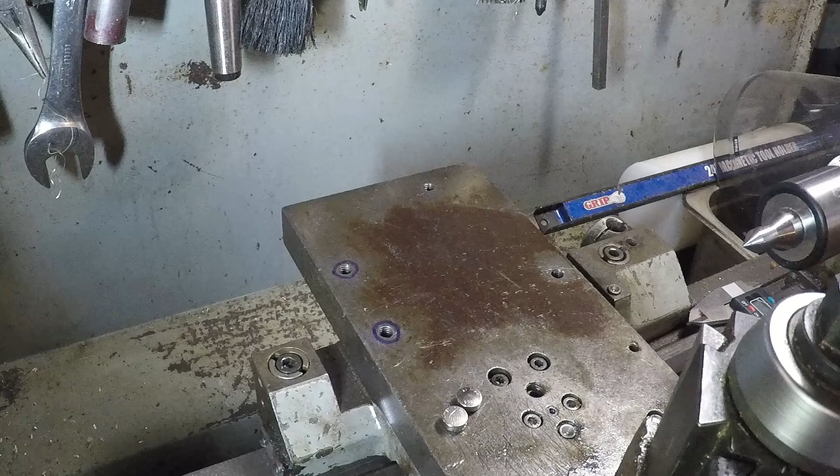So, shooting a video today, looking for some inspiration. Some guys have shown some stuff lately, specifically Max. I was running through one of your videos relative to your...

reverse position parting tool setup. That looks interesting to me because I absolutely despise parting off on this and pretty much any of my smaller lathes.

So I wind up with issues. I try all the dark magic, low speed, plenty of fluid, all these other things that should be working for me. It just doesn't seem to, because I think to your point, and a lot of others, Bruce Witham had the same point he made quite a bit, you just don't have the mass to fight that battle.

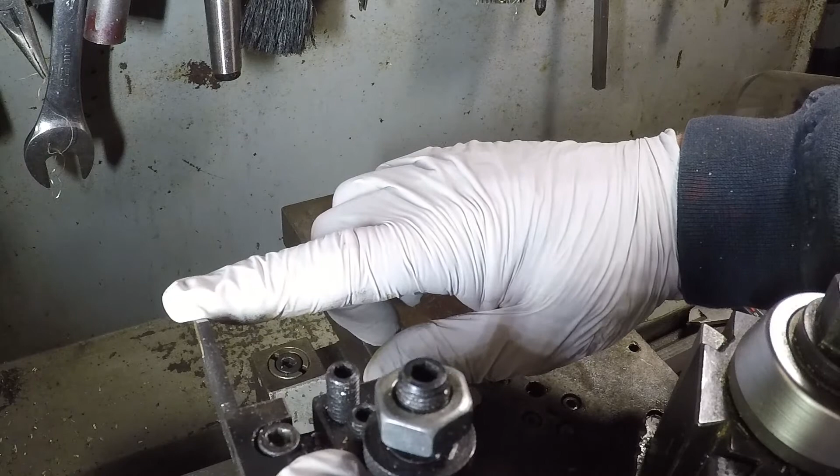So as the parting tool, for instance, this is coming in and it's forcing in this direction, and the part is turning this way. This is basically being shoved down. Well, when it gets jammed up, especially with something like this with a carbide, something's got to give. And either the part gets chucked across the room in your face, or something snaps and the tool breaks.

Or you go in and try something cute, like using, look, Dan's got lots of different ones. Yes, you can use the old standard high-speed steel one. Same kind of results, not quite as bad, but same kind of results.

And the same is true when you try to even say, okay, I'll just go thinner, I'll make a smaller cut. Well, this is one of those from you know where. So from that standpoint, I'm looking at this and saying, okay, what's available to us?

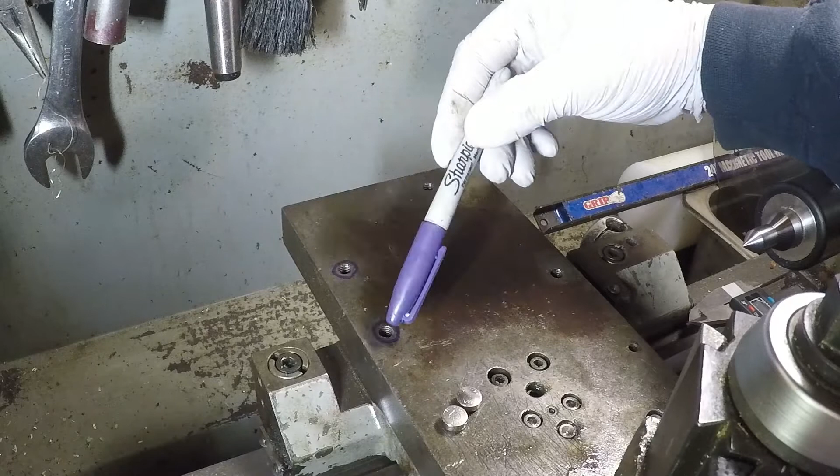Well, this is the M250, the backside of the cross slide here, and I've chased them out today and cleaned out all the threads. These seem to be two blind hole M10s, and the threads are in good shape.

They go down, I would say probably 15 to 20 millimeters, maybe 22 millimeters, and so there's a good amount of bite on the thread. Over here is some additional holes.

This one's not fully blind, but it's going to be basically the same kind of thing. And over here, but these are quite a distance away, so that's a lot to span to try to do it.

So what I was looking at, watching your video, Max, it was relative to holding it true. The one thing I have a question relative to that is I think this will obviously be true to the chuck, getting the height just right.

And because I know when you adjust the tool and things like that, you may run into slight height differences because you want to be dead on center. So that was one thing I was trying to factor in, is the ability to adjust slightly.

I know yours has a wide slot where the tool goes in. It's got a channel here, and then you've got it set and adjusted just right. So should you look at doing something like that and using shims to do the offset, or should we look at something much more complex relative to adjusting the height?

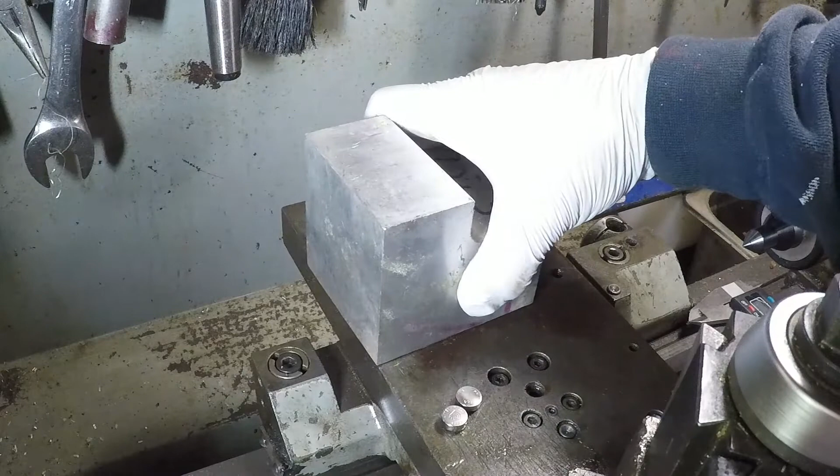So either way, what I was thinking about is looking at using my readily available materials, and what I seem to have the most of right now is aluminum. There's a nice little hunk of aluminum.

It spans those holes. I would come down and probably do a countersunk screw under that, and then go in. Again, we can put the tool wherever you'd like, but that's kind of what I was thinking.

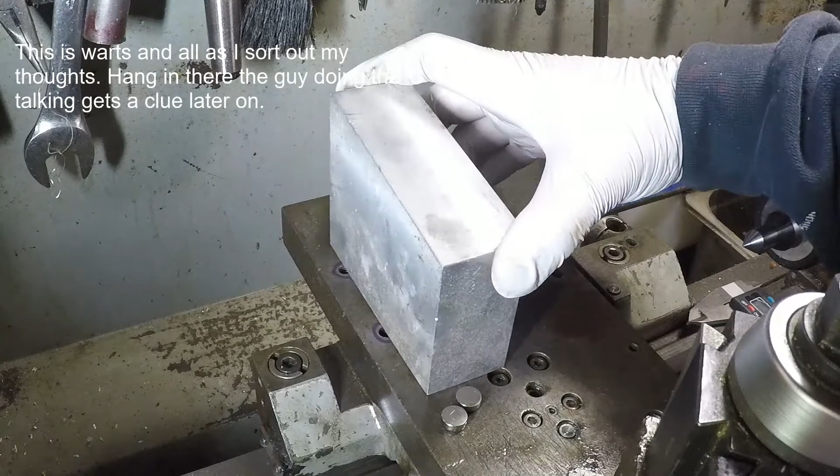The other option I had was this one here. It's a little bit longer, so we could offset the bolts and have plenty of room up in the front for the tool to go through. Again, that's just a couple of things I was looking at.

I don't need an answer from anybody. I'm just saying, if you have a thought, go ahead. If not, that's okay too. I'm just looking at doing something different because I'm just not satisfied. I would do a lot more parting off if I had it.

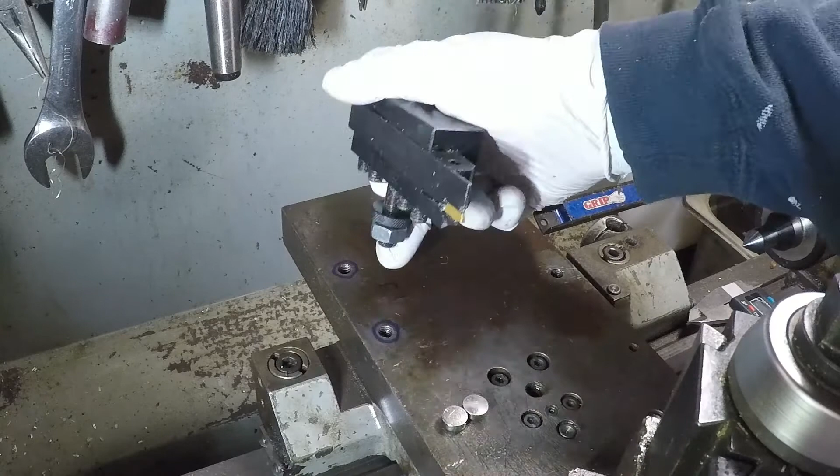So ultimately, the parting tool, we would want it upside down, if I understand correctly, and then at center height. So that's the gymnastics we need to work through with the tool to get it there. Now, I do like these ones with the inserts, even though they break all the time.

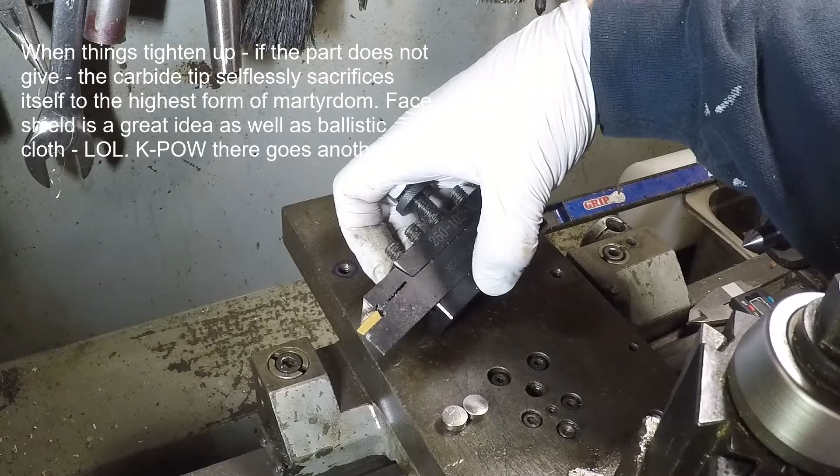In the current configuration, I would like to take a look at either doing that using an existing carbide tip, because they seem to be plentiful, and or switching over to something a little more old school, as I showed before.

This is another carbide one, but that is really quite a bite in that one. So that's a lot for this little lathe to turn. Maybe a high-speed steel variant, upside down. I've got them in the quick change post, but it's just something like that to have it at the right height to introduce it to the work as it comes in from the backside.

Just some thoughts about that one. I haven't started designing or sketching or anything. I was going to use Fusion 360 to sketch it, at least. Maybe I'll show that in another episode.

Another question in the world: why on earth are those batteries for these absolutely constantly dead? I have no idea. I have 5 or 6 of these things running around. Again, they're not great, but these are my knockarounds. I keep the good stuff locked up, but these batteries are constantly dead. I don't know, it's mystery of life.

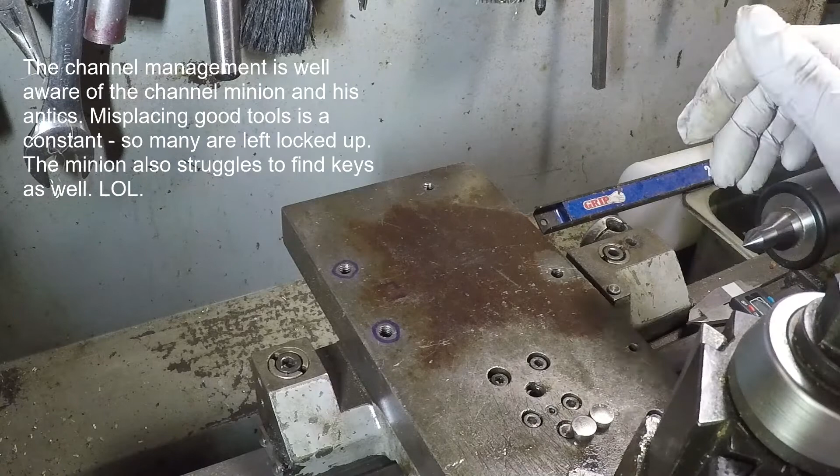Beyond that, we kind of leveled the lathe out today, changed the configuration a little bit, did some work, and just sitting there staring at that and saying, why don't I ask a question via video, so no one really has to be obligated to answer, and at the same time maybe we have some thoughts as a collective, because lots of smart folks out there, lots of good ideas.

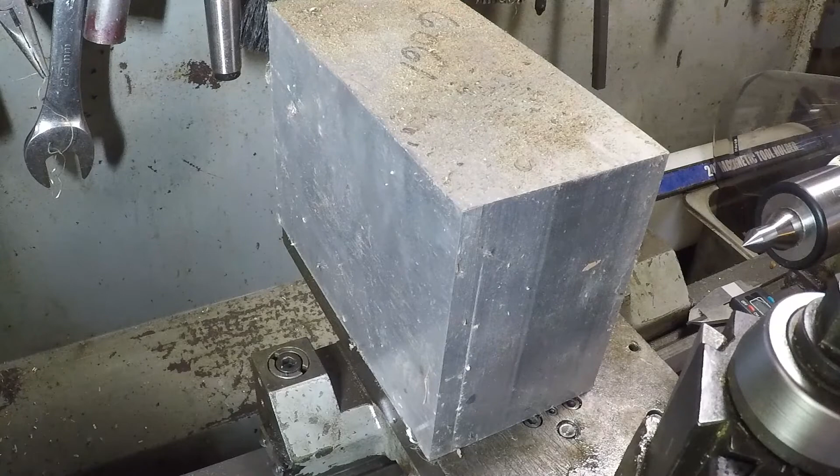But anyway, that's just one of my ideas for that one. Again, to go with something like this with a little bit more mass, or go with something a little longer, if the need arises. We can go a little north of that. So anyway, just as a joke, but anyway, mass is a good thing. I appreciate that, but minimal would be great too. Just some thoughts on that one. If anybody has any, just share them in the comments below.

But I really like the lathe, this Harrison M250. It's very good, very solid, and the best part is I don't have a lot in it. I bought it before the economy improved in the US, and things went up pretty close to tenfold in machine tools. I haven't been able to buy anything on eBay in probably a year, other than just a minimal little something here or there. For a while I was able to collect machine tools pretty aggressively at a pretty good price, but that has been long since not an option.

Even locally, we have a Craigslist here. I think you guys have your variant in Australia and in England as well. Yeah, the prices are still just not right, not even close for used stuff that needs to be fixed anyway. So the good news is every piece of equipment that I picked up has went up in value. It'll go down in value again, but as of right now, I can feel fat and happy that what I have invested in my machine tools are very minimal compared to what they're actually valued at today.

So anyway, that's all for now. I'm looking at some of the other 3D printing. I know I just showed a few of those the other day relative to printing a gear. We've done some bigger ones as well. That one is in PETG.

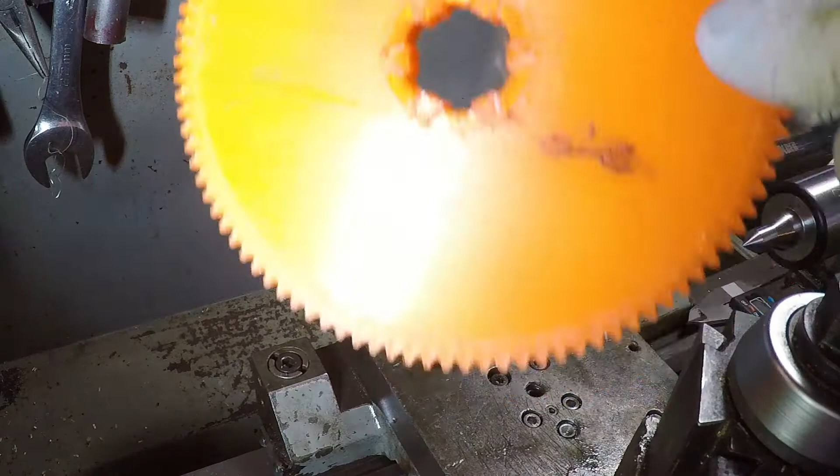It's fine, it works good. The surface, again, adding that dryer, I think, helped the quality of the print, because the material is hygroscopic to varying degrees depending on which one you're using. And hygroscopic, what it gets, okay, one more time, the moisture buildup in the filament itself, when you heat the filament to basically displace it.

Because basically it heats it up, pushes it through a nozzle, and displaces it with the movement of either the bed or the actual print head itself. So from that standpoint, once it gets hot like that, you can imagine what happens with moisture buildup inside the filament. It starts to release as steam.

You wind up with little micro bursts of steam pockets building up, depending on where the moisture is, and it can really cobble up your print. So keeping it dry is important. I may show a small segment on the dryer that I've got.

There's all kinds of voodoo out there to dry them. You can put them in the oven - yeah, I don't think my wife's going to be up for that. You can also use food dehydrators, that works fine. The one I've got actually allows me to dry and use at the same time, so it's nothing exotic, but it's pretty useful, at least for the first test I had.

Beyond that, I think we'll try some more Fusion 360, drawing a couple of things. I am not a master of it. I learned most of what I learned, as I mentioned in the previous one.

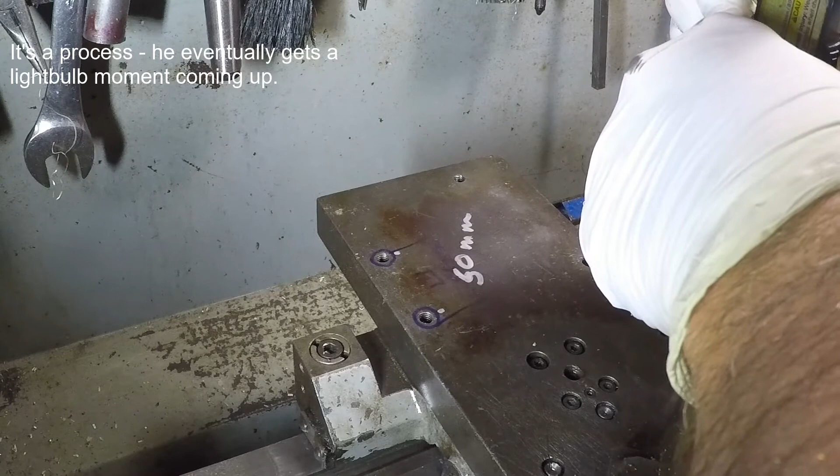3.5 inches, or let's talk about 89 millimeters. Let's try it again, see if we can accidentally repeat. And again - .4. So let's just go with that. I'll qualify everything all over again.

Center, okay, so 50 millimeters in between these two, and about 89.4 is where the tool would need to be on center right here. So again, the channel obviously would be taller than that where the tool would reside, but that's about where I would need to be.

So at least it gets me something I can sketch on, and I'll get out the good stuff and measure it for sure. I've got a couple other items that will be a little bit more precise, but I guess that's about it. So I've got plenty of material, I got the tools to do it with. I just need to get a plan together and then get started.

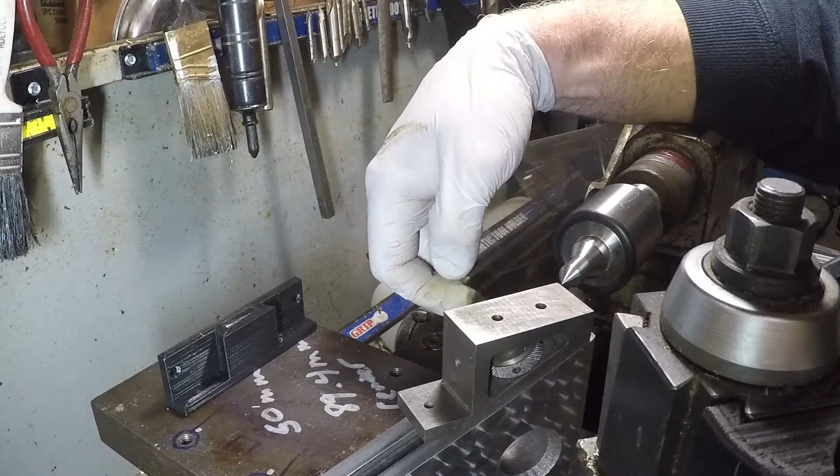So in this case, I'm using this to check that height, going across that, going right to the tip. This will be a little bit more accurate.

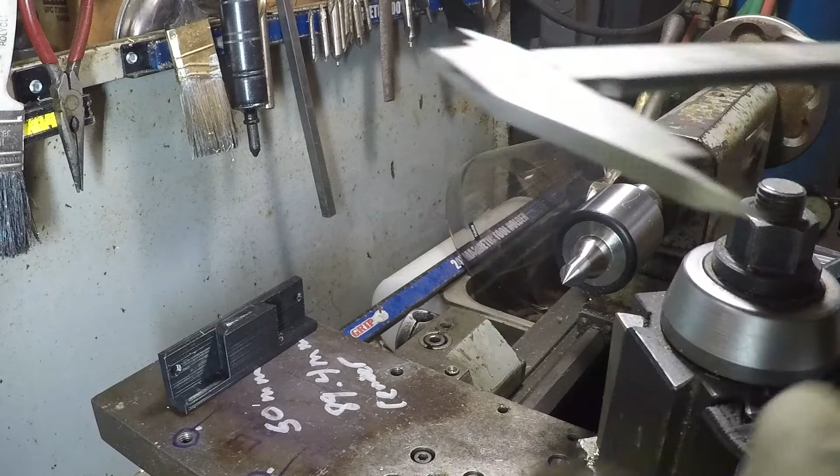Let's call that 88.3. That repeated twice - .2, 88.24.

Neighbors got their dog out, so you're getting a little bit of that. So let's see if we can recreate from scratch. Okay.

88.3. All right, before I forget it, 88.3.

To this point. Boom. Okay. And you thought I had been paying attention. Yeah, these are magnificent for that stuff, as are the adjustable... crap, I'm in my 50s.

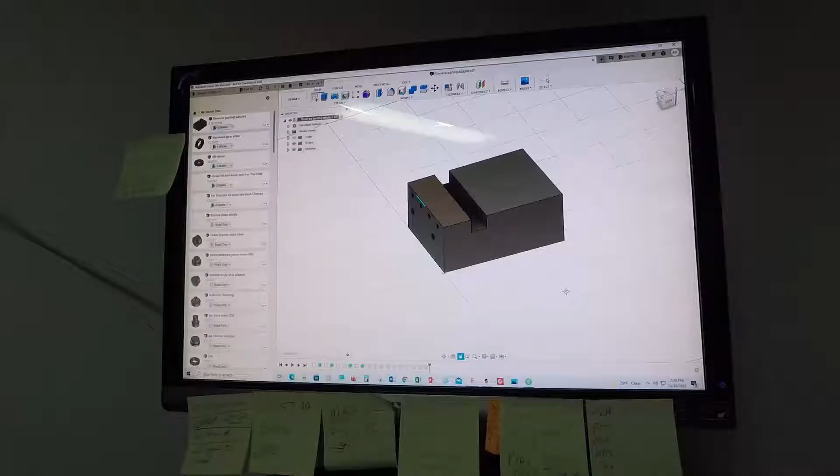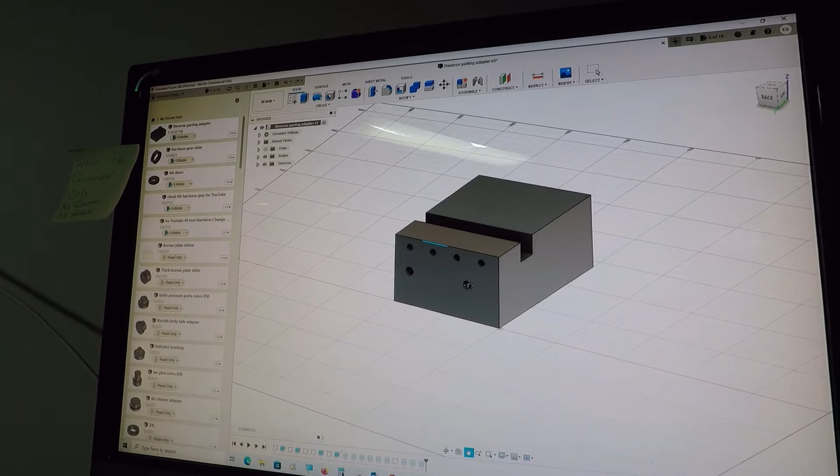Just showing you a kind of a snapshot here of what I was drawing in Fusion 360. I'm free-handing it here, so apologies. But basically model it out, put the grooves, screws in. These are threaded here. I would countersink those, by the way, just so you know. But these are fully threaded, full length here. And there you go. So, not an expert, not good enough to give anybody any advice, but just sharing with you what I got. All right, thanks.

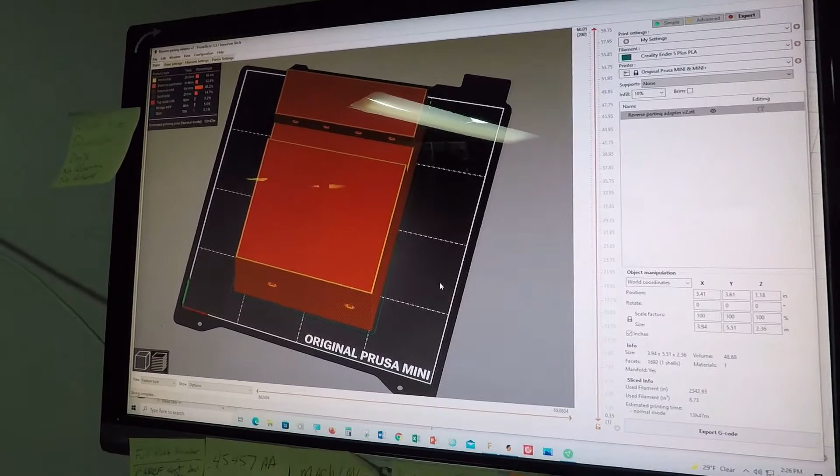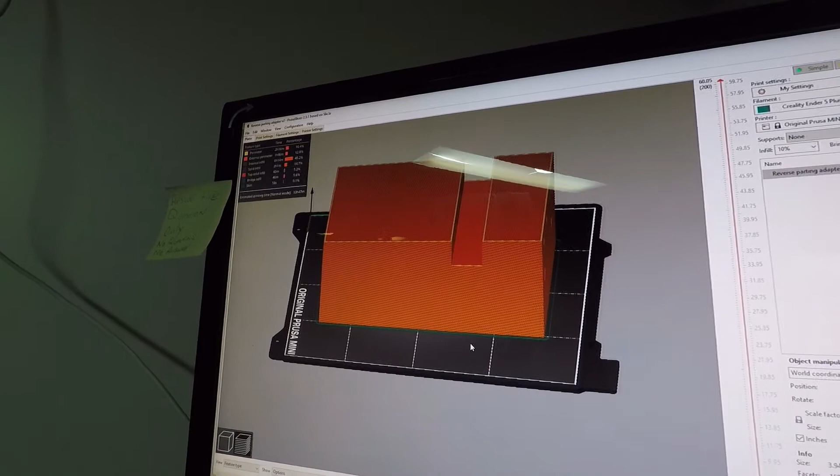And here's the same part in Prusa slicer. Already been sliced, but you get the general idea. 13 hours and 47 minutes. Only a 10% infill, so it was the bare minimum I could get it to hold its shape, but at the same time it allowed me to check everything before I invested too much time making something that wouldn't work. So kind of like a really nice physical template, very helpful for me.

Well, good morning. I spent a little time thinking about this issue again last night. Well, I might have taken some action. So when last we talked, we pulled up some dimensions and we kind of took a look at a few things. Let me show you what I roughed out last night.

Why get excited here? This is just prototype. Oh my, what's that? Well, that's the prototype. A little big, a little bulky, obviously not super clean. However, what I wanted to show was...

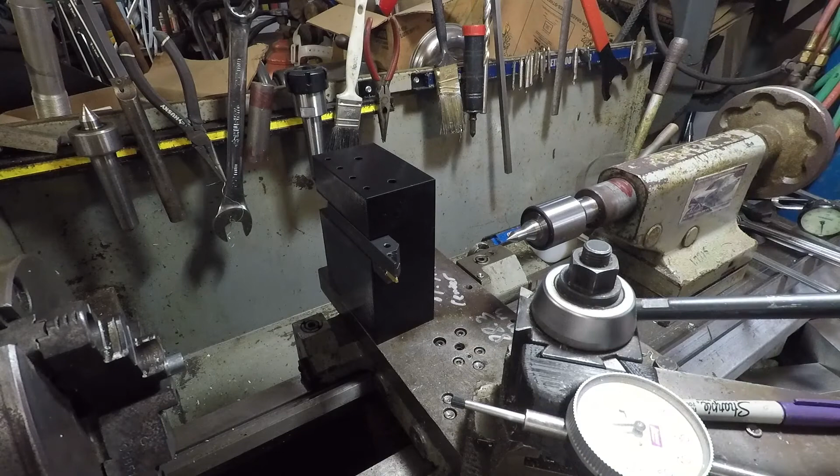We've got the setup on the top here to accept this tool in this one, and we're putting it in upside down. And there'll be set screws here. These two screws should line up somewhere thereabouts with the mounting holes right here. Yeah, I will have some overhang.

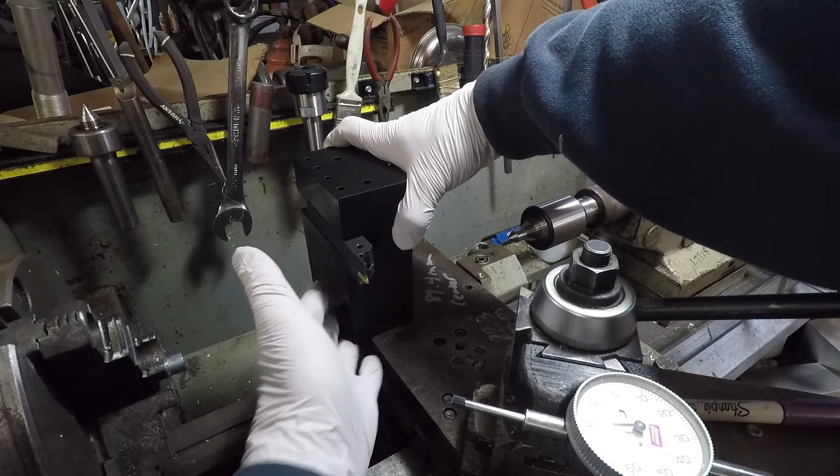I've already thought about that when I was drawing it up. It's going to be like that, but what I want to do is infill down below here to make that square up. So it's going to add another element of holding this. So this will go down and clamp, but at the same time this will have a ridge built in where it will actually pilot and line that up every time, because I won't want to leave it on forever.

It's going to get in the way of something eventually, so I want to be able to take it off and restore it. So for the weight, I'm just going to balance it right like that. Very, very light plastic that I printed last night, so it's to dimension, but it obviously is giving me ideas on things I need to tweak.

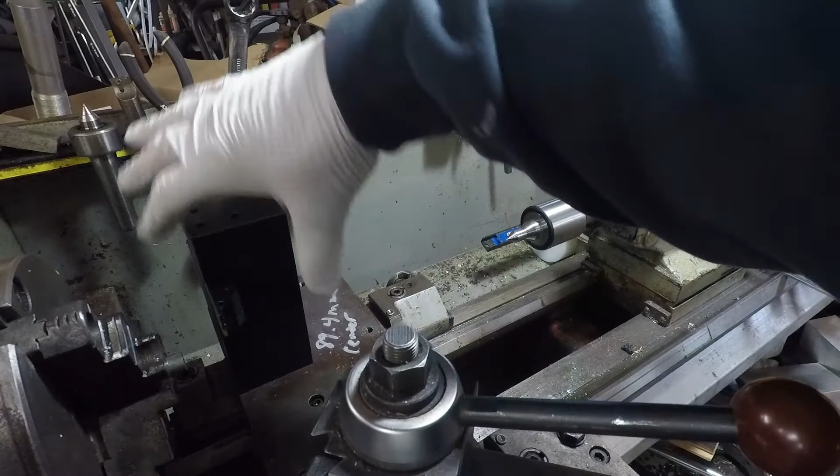However, what I wanted to do was just to make sure, well, obviously I can get up close. Shouldn't be anywhere obtrusive to anything. Okay, and the other thing is the angle. I went ahead and went straight because the angle of the entry is already factored into the tool. So we'll have that one in. Basically the tool has a back relief.

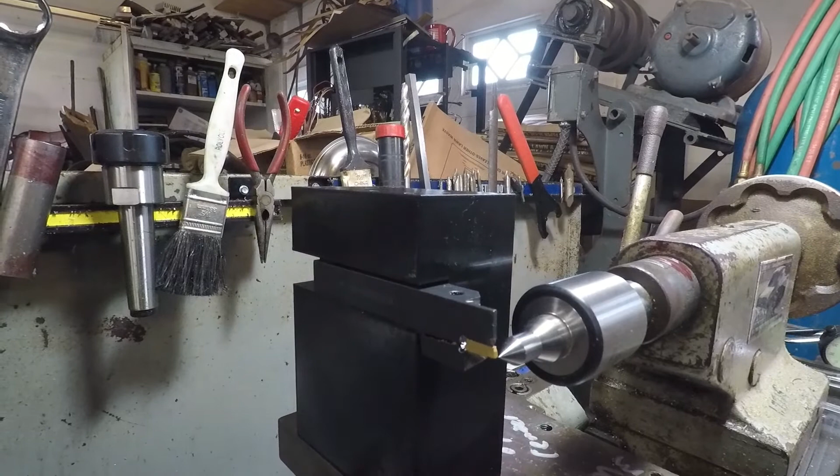Okay, so I'm just going to lock it like that, and then let's find out what's going on. Here, here. Hang on, I'm going to bring them a little closer. Hopefully you can see that. To my human eye, that looks pretty darn on.

So, from the experiment, we've got the height set. We've got the location. I got to double check the holes there to make sure that they're square, but the height is right. So what was it? 89.4 millimeters seemed to line up with this tool, and the tool, once it was in position, would be fairly well supported. That's why I left a lot of mass on the top to give it plenty of rigidity in that area.

So I guess that's really it, because I was very surprised that actually anything that I measured came out fairly close. And with the printing, it only has 3 walls, vertical and horizontal, and then only like a 5 or 10% infill. So it's not strong. So this is not the part, this is just the concept, so we have an idea of what to do. But that shows me that my initial forays with these original blocks probably is a little light.

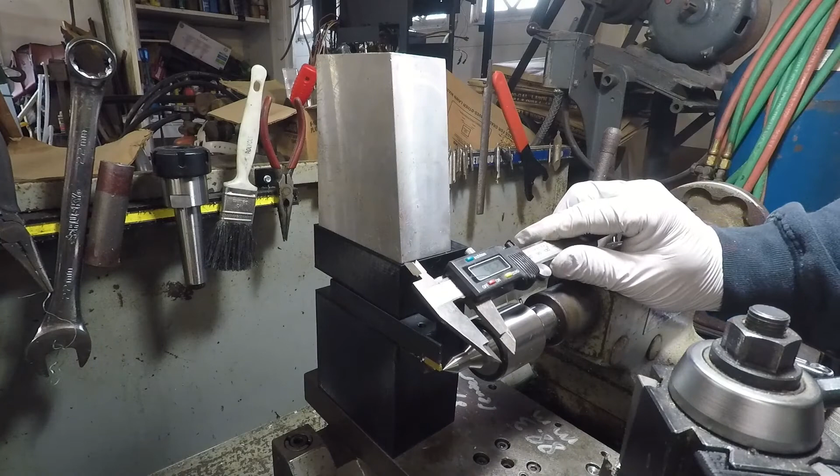Yeah, that's close. I could probably get by with it, but by the time the bolt holes come in... what was that, 9 millimeters? Yeah, roughly. They come in right about the edge of the bolt. Right about there. Okay, there's the bolt hole.

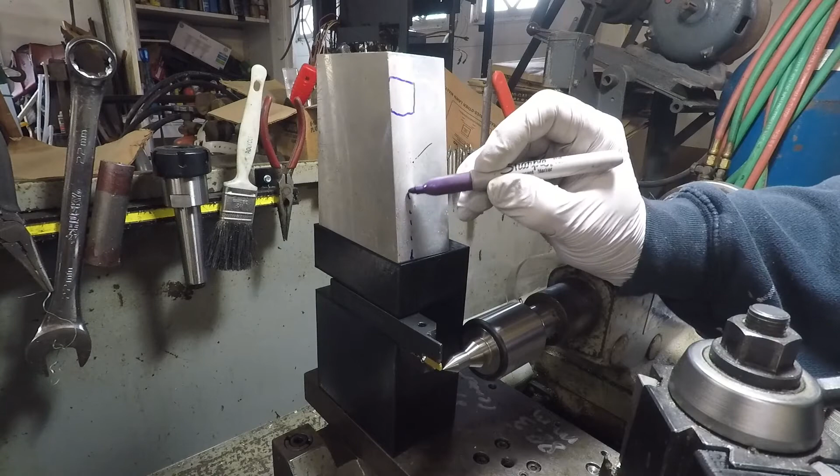Front to back, if I were using this on the square, and then in addition to that, the channel at the top, just going to marker it in here, right like that. So if you'll notice right here, that's gonna run right into it if I was coming all the way down through.

Which I kind of like that idea, because if I bore it tightly for the bolt and use a countersunk cap screw, an Allen headed cap screw, it's going to basically be very rigid, because it's going to be pulling down and providing side to side support all at the same time.

So the other option is to put this on the back side, right like that. Well, that would clear the bolts, and that might be a good option. The issue I have there is, will it give me the clearance to still do what I want?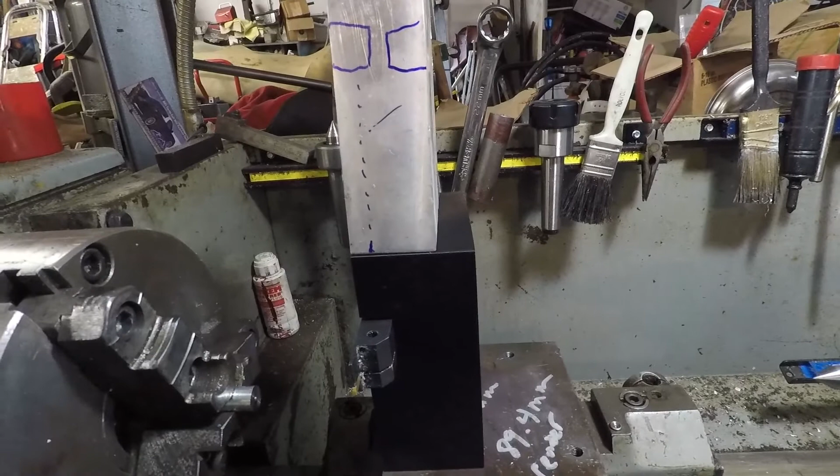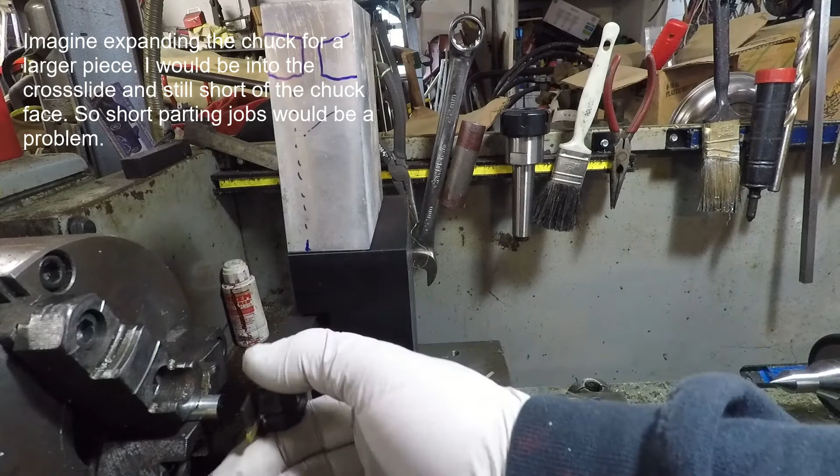And I think what I'm going to run into is it's getting really close to the carriage and the chuck. So if I were just kind of using this as a rough sketch, if I were right about there, I'm going to be into the chuck, maybe. If not, it's going to get really close, and I'm not real sure.

So I do like having it out here on the edge, which gives me the clearance, so the carriage really isn't interfering with anything, and I can make a cut all the way in, right up to the chuck itself, without having anything to do with the carriage coming anywhere near close.

Here, let me give you a brush. There we go. So I'll be able to cut right up to the chuck itself, part off, and there's really nothing going on with the chuck or the cross slide there. So we would be clear of all of that mess.

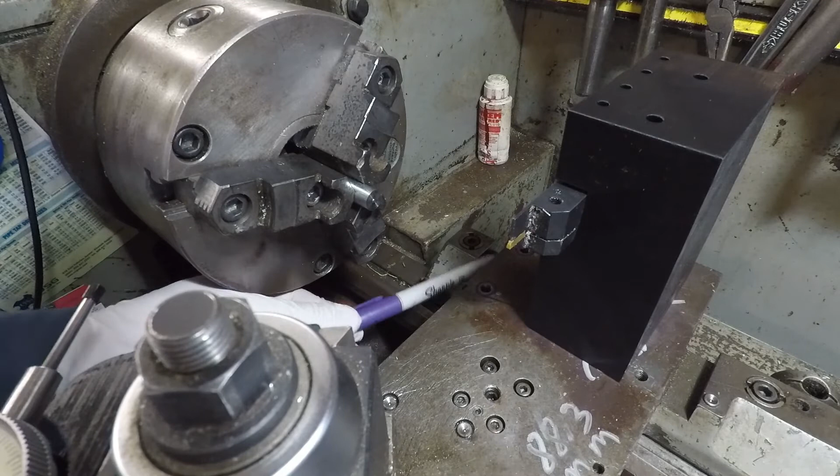And if I really, really wanted to get fancy, I can actually bolt it to the front, but I don't think that's necessary. But I would bolt it here, and to the front, but I think that's way overkill. Takeaway from this one is, before I start drawing any further, I did this in Fusion 360.

If anybody's interested, I'll flash it on the screen so you can see. But it's very easy to basically set these up to bore the holes, and you can kind of see the imagery where it is.

I'll post this up and you guys can give me some thoughts, but I think ultimately the height's right. It should be pretty square against that, which would allow me to just set it and forget it. There is probably a little variability here, but when I set those forcing screws, I only left just a little bit of clearance there.

That was, so I may have to get, where would I go, 16? So I'd be able to get a 1/2 inch tool in there as well. This one currently measures 16.5, I believe. I'll measure this one real quick.

That's 16, and then I left it at 1775. So actually, probably by the angle, it's probably closer to 18. That'll give me a little bit of flexibility.

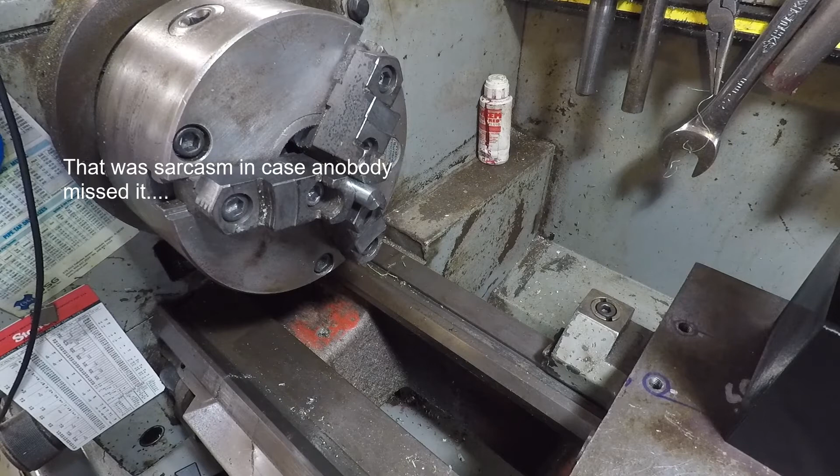One second here, I'll get these screws out. You can hear my dogs out there. Well, that one's stuck, so I'll not use that for this discussion.

And yeah, we won't use that one either, so. Alright, hold on one second, let me get this out.

Okay, the miracle of a brass mallet and two of the lightest taps at the right angle. Miracle of miracles, I'd still be able to use this one. And this is the nice one from the Iscar.

Alright, I mean, it's not perfect, but it's going to be squared up once it's in there in the location. So that's actually pretty cool. We'll be able to use one or either.

Unfortunately, the Iscar inserts are very tough and very wide. I mean, that's a lot of beef to be taken off in one cut for this machine.

So there's my prototype. We'll double check the holes, make sure that they're okay, and then, because I have a block big enough to handle this too, show the entire entourage of materials.

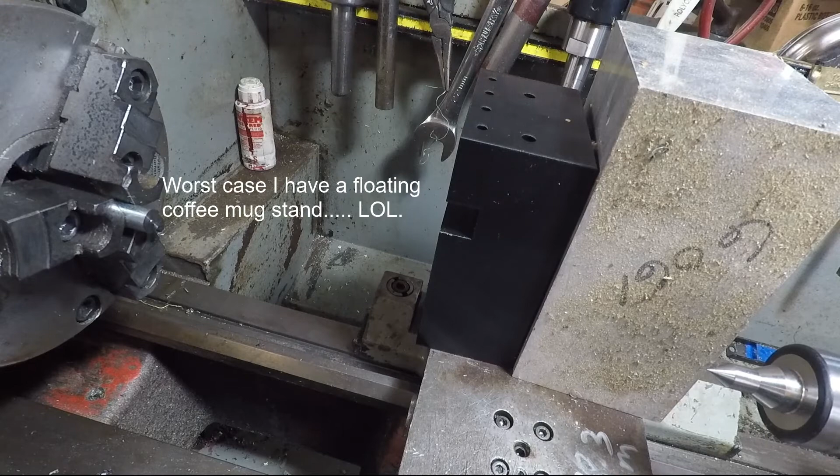Oh yeah, yeah, we can easily do that. If need be, we can even cut the channel and leave the rest of it alone. That's quite a bit of mass, but hey, that would be quite a bit, but you know what, ultimately it would certainly be a force for good without having to do a ton of machining on it.

And up here, don't fall down, as the last time I went and bought scrap, aluminum was $1 a pound, so that, 10-15 pounds of raw material there in aluminum, I think we would still be just fine.

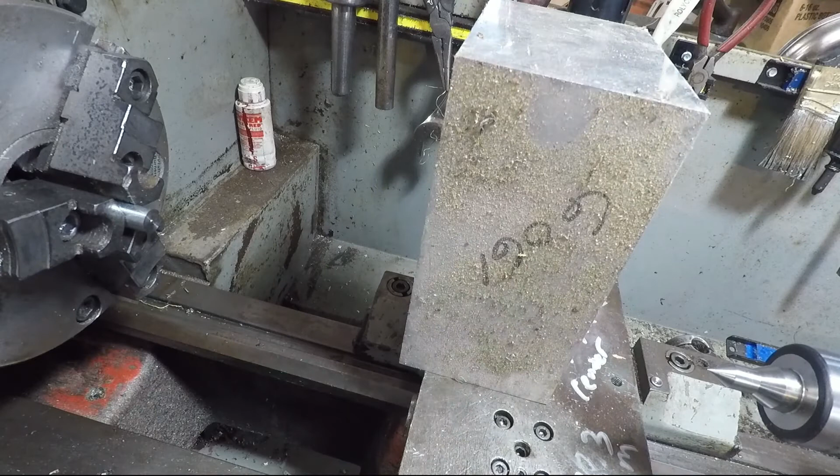And I got plenty of height. I could actually mill in that shoulder that I looked at, square that up, and then I think that thing would be very cool. Again, that's a lot of real estate, but once you've got your center going through, it would impact the size of the shaft I could turn.

Let's get some more thoughts about that. This is how my brain works, folks. So from that one, you could turn quite a bit. You part it off, then you can bring it in. Yeah, that's going to be quite a big hunk of metal. I think I'll be doing that.

Yeah, okay, anyway, that's my thoughts from today.

Sometimes my wife will tell you I'm far better at fixing than I am in designing and building. And I really hate drywall work. But conceptually, there it is in plastic.

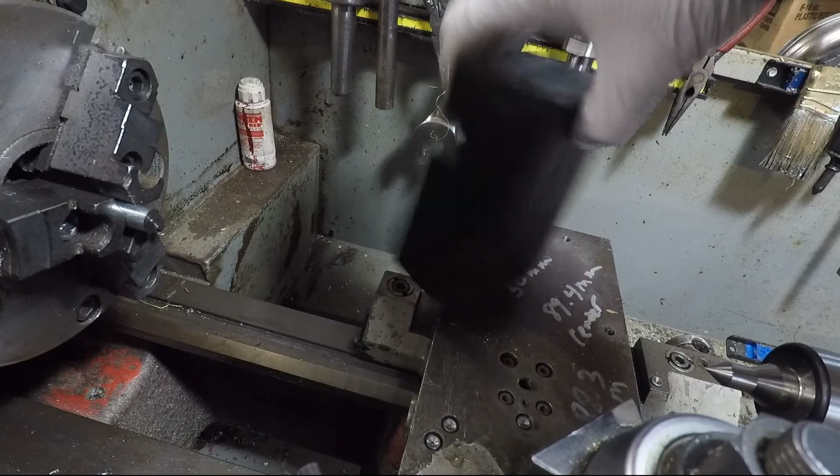Again, I'll celebrate the fact that it's the right height, and we'll continue on from there. But yeah, like I said, any additional thoughts anybody has, those are obviously welcome. There's not a lot of real estate to cut a curvature into this or anything. So, and again, I kind of like it the other way versus this way. I would sit right about like that. But yeah, this would be getting into the chuck before that bit would really be doing much. So, gonna kind of probably stay on this side.

And go from there. Alright, that's your update, and then I'll bring you up to speed as I get going. This is just something I sat there and sketched out last night and put on the printer.

And good thing about 3D printers is they don't need you. Once you get past the first layer and it's got plenty of filament, it really doesn't need your attention.